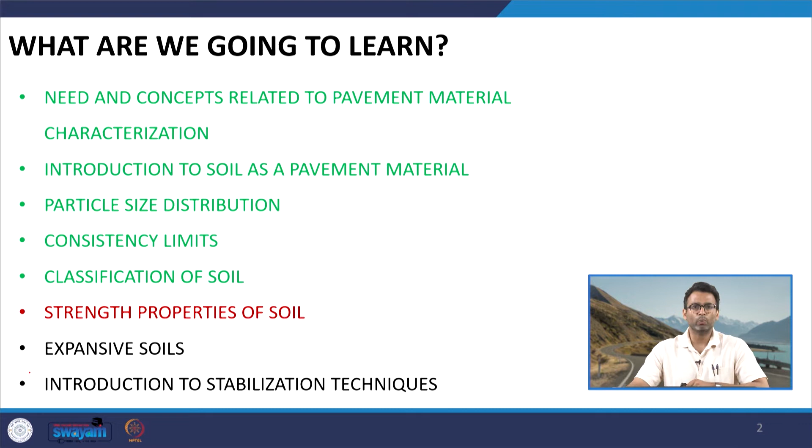Today we will start discussing the strength properties of soil. Under strength properties, first we will talk about the compaction characteristics in soil, which is one of the very important characteristics, especially when we talk about construction of pavements.

Ideally, any soil over which a construction has to be done, it can be any form of construction like a building, a dam, or a pavement, that soil should have sufficient load bearing capacity. In other words, it should have sufficient shear strength to take up the load from the superstructure.

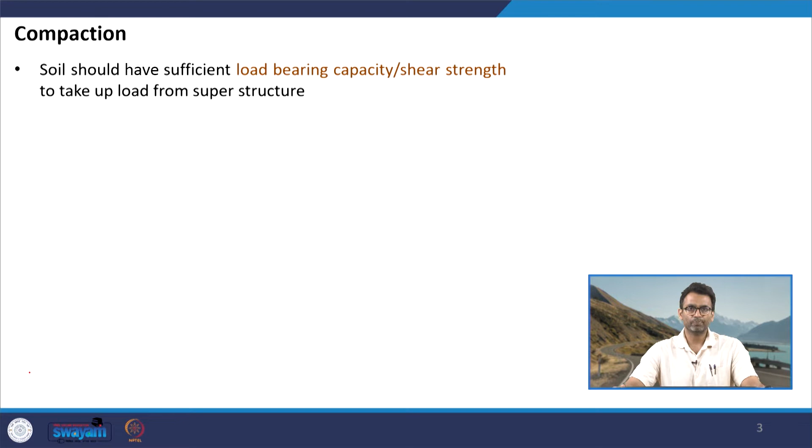Now, there are various ways of improving the soil, improving the load bearing capacity of the soil. Among various techniques, mechanical compaction is one of the efficient, and I would say one of the simple techniques to increase the bearing capacity of soils.

This is true both for cohesive and cohesionless soil. However, the effect of compaction on different types of soil can vary to different degrees. We will talk about these characteristics related to compaction for different soils today.

Now, when I say that compaction is a method to improve the load bearing capacity of soil, and that compaction is an important parameter to be considered for construction, how do we measure this degree of compaction, or how do we quantify the compaction in a given soil?

The compaction can be quantified using the parameter dry unit weight of the soil.

If you see the phase relationships of soil, there are various terms to be defined which you might have learned in a class on soil mechanics, or which you will learn later. However, you need not worry about those terms, because for us, the terms that are important, we will try to define and understand the physical significance of.

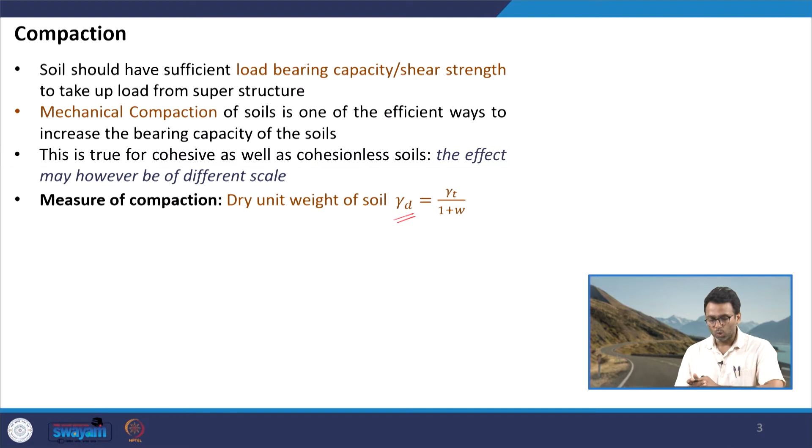So, the measure of compaction, as I said, is the dry unit weight of soil, denoted as gamma suffix d, gamma d. Looking at the volumetric phase of soil, gamma d is nothing but the weight of solids divided by the total volume of the soil material.

This is what you mean by the dry unit weight of soil, and it is related to gamma T, the total unit weight of soil, and W, the moisture content in the soil. The definition of moisture content we have already discussed: it is weight of water divided by weight of solids, into 100, in percentage.

Similarly, gamma T, the bulk unit weight of soil or total unit weight of soil, is defined as total weight of soil divided by total volume of soil. So when I say gamma T equals Wt by Vt, a soil mass comprises soil, air voids, and water. If all the voids are filled with water, then we have only soil and water present in the volume.

Therefore, the total weight of any soil, since air does not have any weight, can be written as weight of soil plus weight of water, divided by total volume.

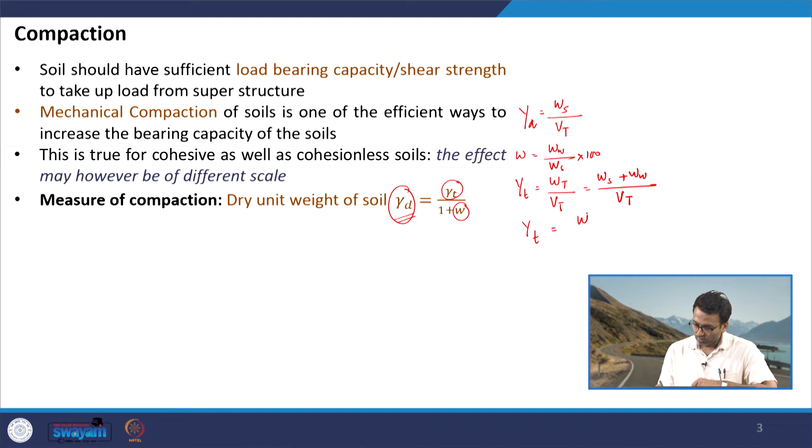Now, gamma T can therefore be written as weight of solid divided by Vt, plus weight of water. Now, moisture content, as I said, is equal to weight of water divided by weight of solid into 100. So, weight of water will become equal to the moisture content in the soil into the weight of solid, divided by Vt.

So, gamma T therefore becomes equal to weight of solid divided by Vt, into 1 plus W, and Ws divided by Vt is nothing but the dry unit weight of soil. So this is gamma D into 1 plus W. Therefore, the dry unit weight of soil becomes equal to gamma T by 1 plus W, which is also a parameter to quantify the degree of compaction in the soil.

So, higher the value of the dry unit weight, more compacted the soil is, more dense the soil is, and the soil will have higher strength.

Now, talking about the parameters that affect compaction, or in other words the parameters that affect the value of gamma d, are the moisture content and also the compactive effort.

So we will try to understand this figure first. This is the dry unit weight on the y axis, and on the x axis we have the water content. So when the soil is in a dry state and we slowly start increasing the water content, this water facilitates lubrication of the soil particles. The soil particles now have less friction between them to move about each other, so they can compact into a dense mass. As you increase the moisture content, the density of the soil increases at a particular effort of compaction, because compactive effort also affects the degree of compaction. So at a fixed compactive effort, this is what will happen.

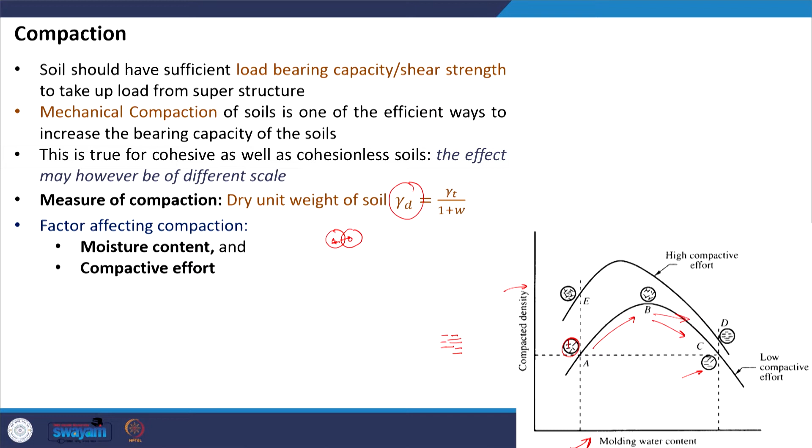And this is why the strength of the soil in this state is less, because the more flocculated the structure, the more particles are intermingled with each other, which means they have higher strength.

We will also discuss another curve, the shear strength versus moisture content curve. This curve will be similar to the dry density versus moisture content curve, but the optimum moisture content at which you achieve the highest shear strength is usually on the dry side of the typical density moisture content curve. Which means if the density is maximum here, probably for the same soil the shear strength will be maximum at a moisture content which is on the dry side of the optimum. The reason is the same: on the dry side you have a more flocculated structure, giving more shear strength between particles, compared to the right side of the curve, where you have a more dispersed structure, meaning the shear strength of the soil will be less.

This also tells us, in the field when we compact the soil, and shear strength is one of the important strength parameters, why not compact the soil at a moisture content lower than the optimum, or on the dry side of the optimum? The reason is, if you compact the soil on the dry side of the optimum, though you will have higher shear strength, if the moisture content of the soil changes and more moisture comes in, then the soil loses its strength. That is why usually in the field compaction is done corresponding to the dry density and not the shear strength parameter.

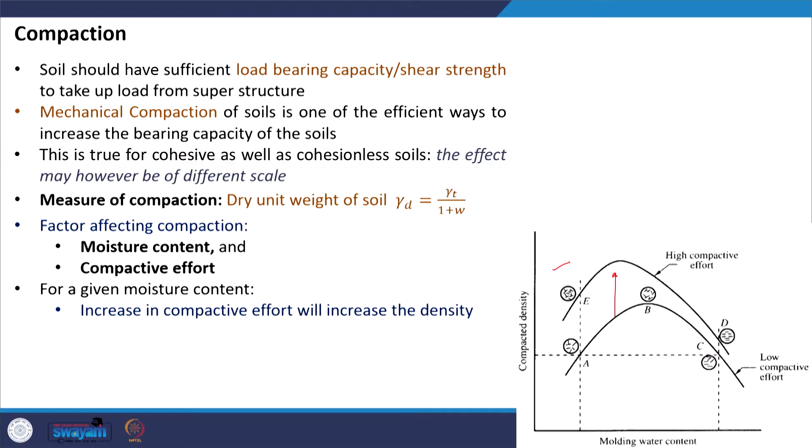Increasing the compactive effort shifts the optimum moisture content to the left. A higher compactive effort means the optimum moisture content at which we achieve highest density will be lower compared to the optimum moisture content for soil compacted at a lower compactive effort. So for a given moisture content, increase in compactive effort increases density, and for any given compactive effort there is one moisture content that leads to maximum density in the soil structure, called the optimum moisture content.

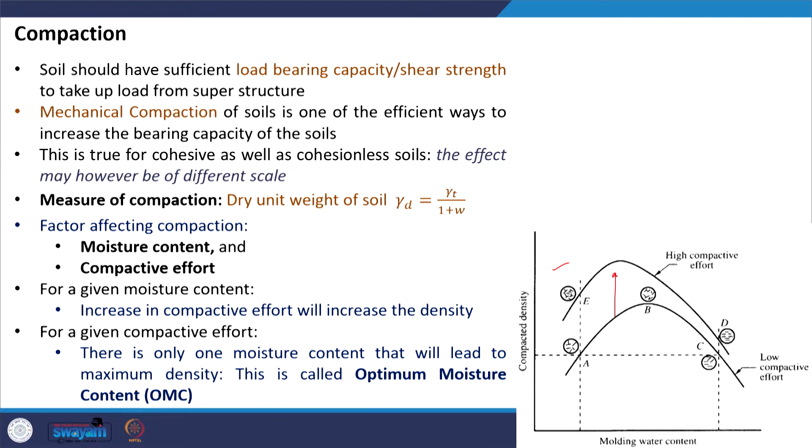In the field, once we know the optimum moisture content from laboratory experiments, we know the soil will be used for construction of embankment or subgrade. The soil present in the field will have some natural moisture content, so we find that moisture content and, knowing the optimum moisture content, add or subtract water as needed to ensure that while compacting, the soil is at the optimum moisture content.

In the field, we have various machinery to mix the soil with the required quantity of water, spread it to a uniform thickness, and then compact it. For mixing we can use blades or disc harrows, for spreading we use motor graders, and finally for compaction we use different types of rollers. We will discuss these as we proceed in this lecture.

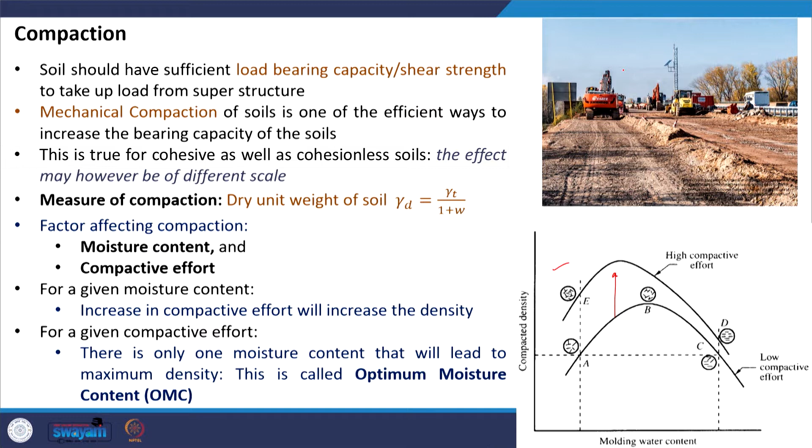Now let us discuss how, using laboratory experimentation, we evaluate the optimum moisture content for the soil and the corresponding dry density to be used in field construction.

For compaction of soil in the laboratory, usually we have two standard methods: the standard Proctor, also called light compaction, and the modified Proctor, also called heavy compaction. For pavement engineering purposes, most investigation done to evaluate optimum moisture content and dry density of soil is done corresponding to heavy compaction.

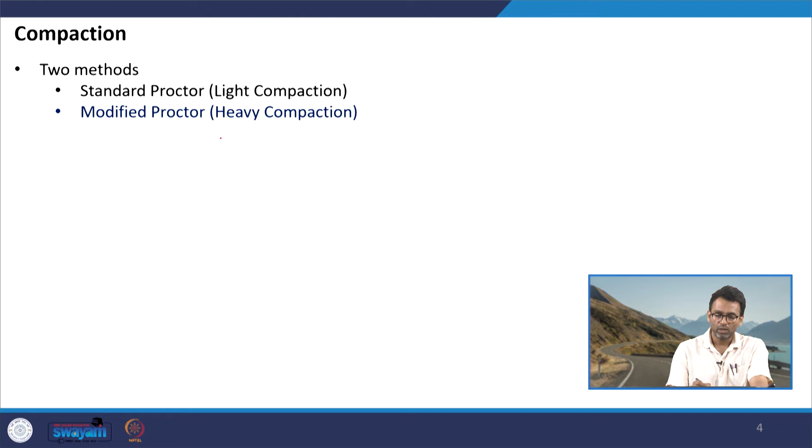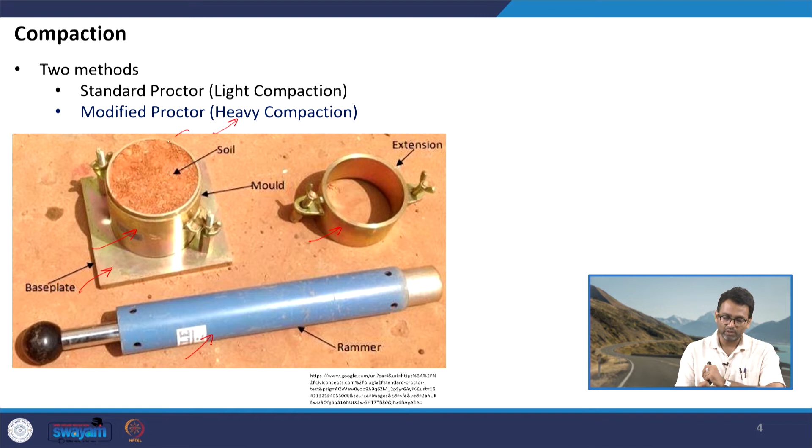These are some parts of the experimental setup used for doing the Proctor density test. We have a base plate, a standard mould, a collar, and then a hammer, and finally we compact the soil through a particular process.

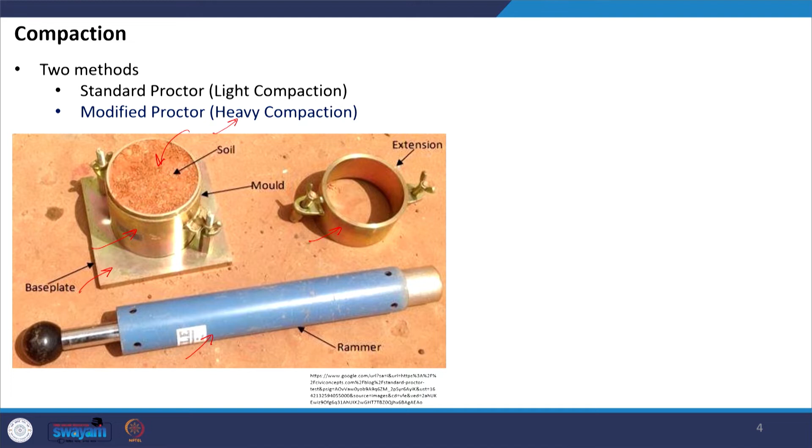Before discussing the steps involved in evaluating the optimum moisture content, let me show you the standard Proctor mould. In my hand I have the standard Proctor mould with the base plate and the cylindrical mould. We have a collar placed at the top, used to remove excess soil after completing the compaction process. Then we have a hammer here, free to move, which has a specific weight and a specific height of fall while doing the compaction test.

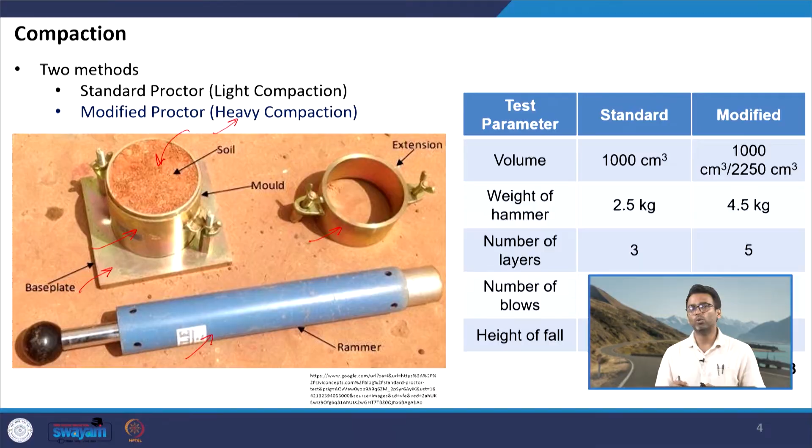Now let us see the steps involved and the difference between standard Proctor and modified Proctor, and discuss the steps used in the laboratory for this experiment. In general this is a very simple experiment; it requires some physical effort, but the procedure is simple.

The standard Proctor mould is 1000 cubic centimeters in volume. The modified Proctor mould can be 1000 cubic centimeters as well as 2250 cubic centimeters. The one with 2250 cubic centimeters has a cylindrical diameter of 150 mm, while the 1000 cubic centimeter cylinder has a diameter of 100 mm.

So when do we use the 2250 cubic centimeter modified Proctor mould? This is used when the maximum size of aggregate in the soil structure being analyzed is up to 37.5 mm. The reason is, in a small mould, if the aggregate structure has some particles of very large size, when you put this material in the mould those larger particles may occupy the surface, and when compaction is given, it is applied ideally on these larger particles, making the compaction non-uniform and the transfer of energy non-uniform in the soil structure.

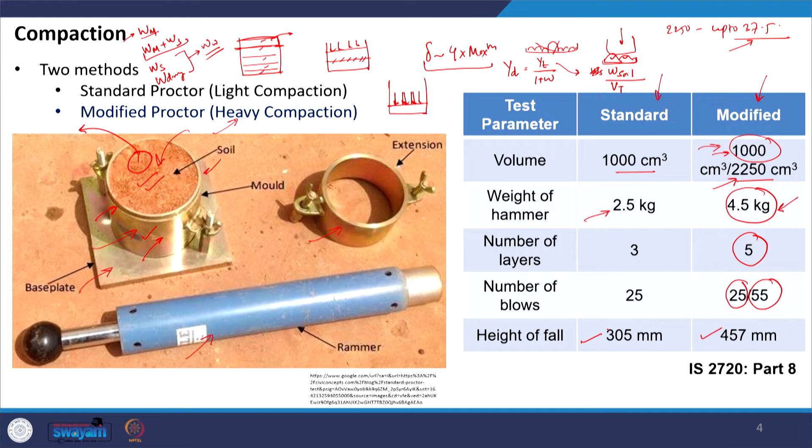The height of fall when you are doing the compaction in the modified Proctor is 457 mm, while in standard Proctor it is 305 mm. So these are some of the test parameters. We have already discussed the process of doing the test.

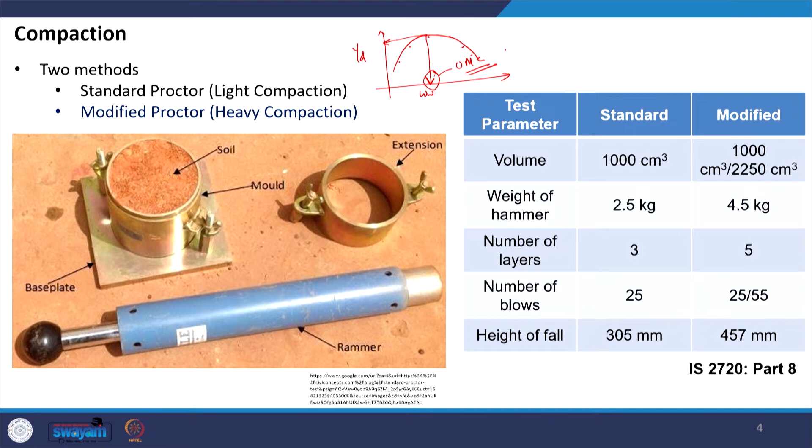So finally what we will have is a curve at different moisture content and different dry densities. You have some points here, just join this point using a smooth curve, and you see that at the maximum dry unit weight, what is the moisture content, and this moisture content is the optimum moisture content. I hope this process of doing the test is now clear to you. This is a typical curve which you will get after you perform the test.

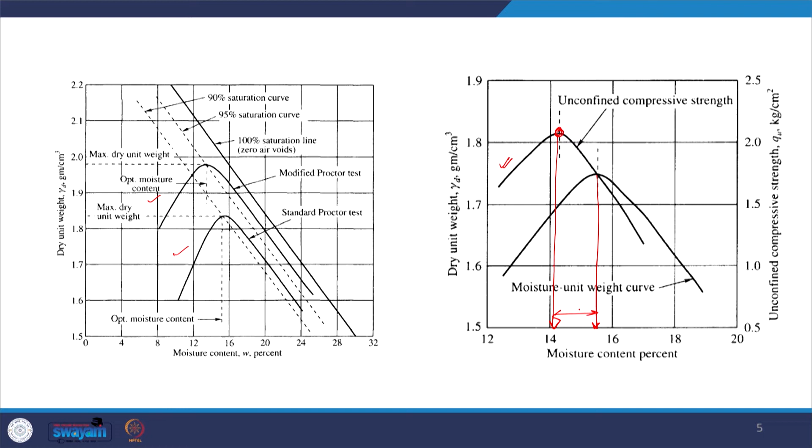As I mentioned, if you are trying to find the shear strength of soil, you will have a similar curve, but the moisture content at which you get the highest shear strength will be lower than the moisture content at which you get the maximum density. But in the field, we will take the curve corresponding to the maximum dry density.

Now let us see what happens if it is a sandy type of soil. Sandy soil has some typical characteristics. Let us assume we have purely spherical particles of the same size, placed in the loose state. In the loose state, if you try to find the void ratio - which is a new term, the volume of voids divided by the volume of solids -

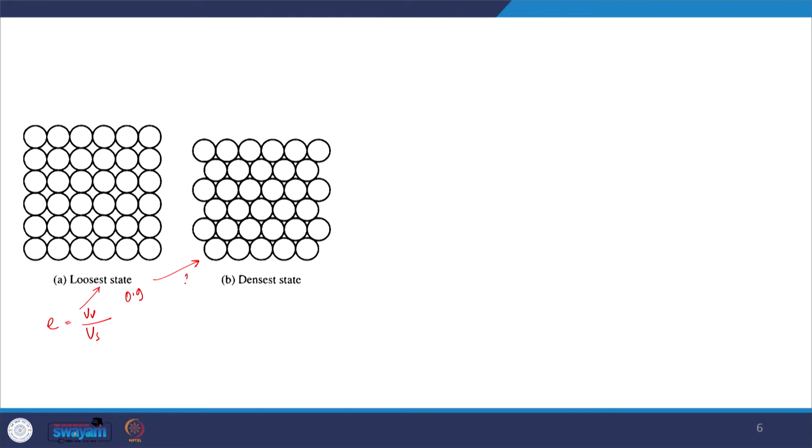the void ratio is typically very high, about 0.9. The same soil particles, if placed in the dense state, will have a void ratio of approximately 0.35. Here we are assuming the particles are of the same size. In the mass, if we have larger and smaller particles, the smaller particles will pack inside the voids created by the larger particles, so the void ratio in the densest state will further reduce, to as low as 0.25.

So in sandy soils, which do not have cohesion, in the loosest state they have some packing characteristic in terms of void ratio, and in the densest state also they have some packing characteristic. These are both in the dry state - we have not added any moisture - still these two states can be achieved. The density of such soil in the field is rather quantified by comparing the actual density with these two extreme states of density.

So that is called the relative density. Relative density for sandy soil is calculated as E max minus E actual, divided by E max minus E min. This is more of a normalized form of denoting the density of the soil.

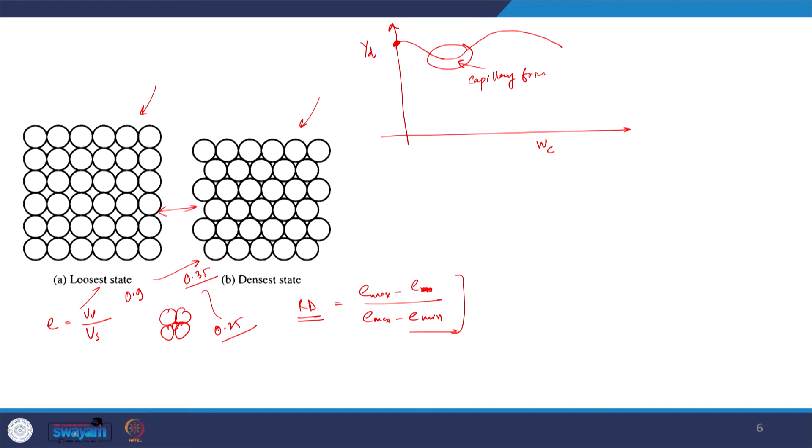If you see the variation of density of sandy soils with respect to moisture content - looking at dry density - when moisture content is 0 and the soil is compacted, you get some dense packing. With increase in moisture content, initially the density will reduce, and then after some time the density increases. The reason for this reduction in density is the capillary forces of water, which resist the packing of the sand particles. This is the point where you see complete saturation of the sandy soil.

One more typical characteristic of sandy soil, being cohesionless, is that applying only compactive effort will not lead to increase in density. This compactive effort should be in addition to some vibratory loading. If you give a vibratory load to cohesionless soil, it will pack into a more dense configuration compared to giving only a static load to densify that soil mass.

You can also try this experiment very simply at home. Take a clear glass or bowl, take some natural sand in dry state and fill it in the cup - you will see the sand occupies some volume. If you pat with your palm on the sides of the cup, you will see the sand particles settle down and pack into a dense configuration. This is a form of vibratory loading which we give with our palms, just by shaking the glass or bowl, and it densifies.

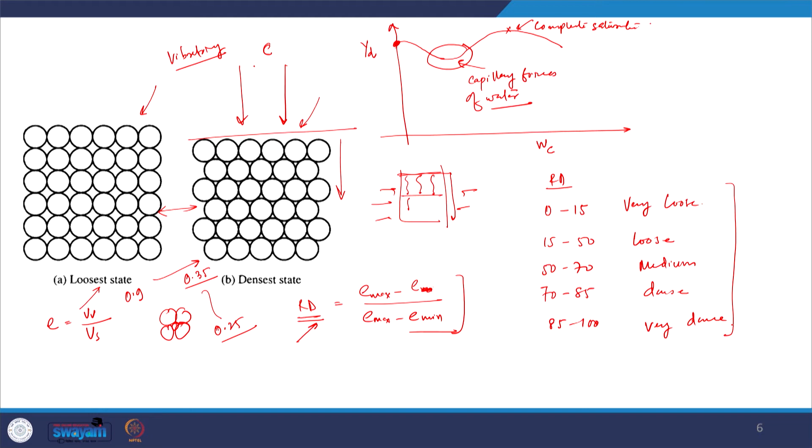This indicates that vibratory loads are more appropriate for compacting cohesionless soil compared to static load. Based on the value of relative density, we can categorize cohesionless soil into different categories. If relative density is between 0 to 15, the soil is very loose. Between 15 to 50, it is loose. Between 50 to 70, it is medium. Between 70 to 85, it is dense, and between 85 to 100, it is very dense. This is an approximate way to quantify the compaction characteristic of cohesionless soils.

So, let us now discuss what we actually do in the field. We have different equipment for initiating or completing the compaction process. We have blades and disc harrows to pulverize the soil and mix it with a given moisture content. We have motor graders to uniformly lay the soil at a particular depth, and then we use rollers, a typical roller you see on the screen here, to compact the soil.

So usually, let us say you are trying to construct a 1 meter embankment. We do not put the entire volume of soil in this 1 meter depth at once and compact it, because the machinery we have, the typical rollers we use, will not be able to compact this entire soil to the required dry density. After compaction, each layer, each point should have that particular design dry density in the field.

So usually the soil or any layer is compacted in sublayers, and the depth of the sublayer in loose condition will depend on the type of roller and the type of soil. For example, in embankment and subgrade, at one go we can compact up to 200 mm or 250 mm. In case of granular layers, we can compact in layers of 100 mm or 200 mm and so on, depending on the type of roller used in the compaction process.

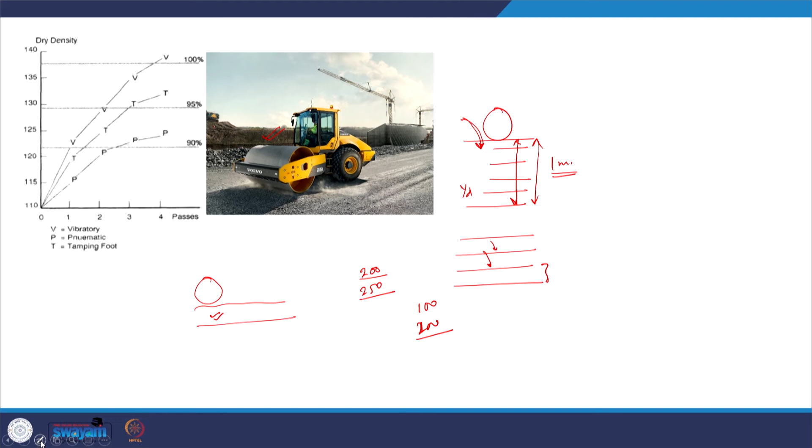So how do we assess how many passes of rollers will be required at this site? Typically, we construct a test section. In the test section we use the same soil with the given moisture content, and we do trial passes, drawing a curve between number of passes and dry density for different types of rollers, depending on which roller has been decided for use. Let us say you have decided that a vibratory roller will be used. You plot this graph from the data obtained from the trial stretch, and use this graph for construction purposes.

From here you will see what your design specification is. Let us say the design specification is that a minimum of 98% of the dry density is required. You will see what that particular value is. Let us say this is the 98% of the dry density achieved in the modified Proctor test. You take this value and determine how many passes are required. For different types of rollers the curve will be different, because all rollers give a different magnitude of energy to the soil being compacted.

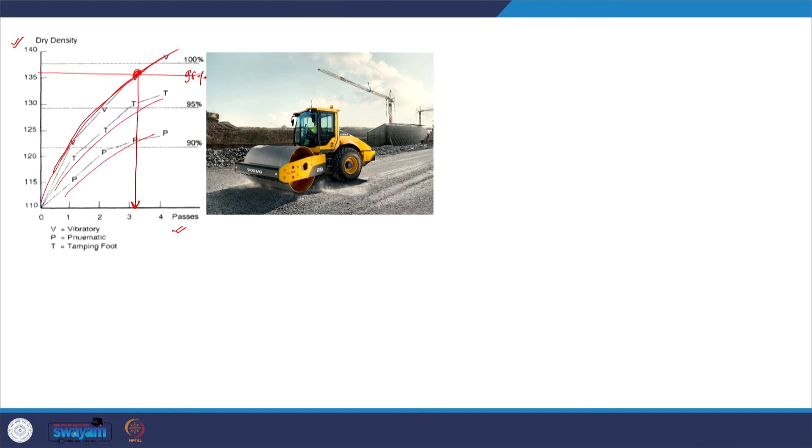So we have various types of rollers available for compaction. We have static rollers that just move and compact the soil. We have vibratory rollers which can be operated at different frequencies, giving a vibratory load to the soil for compaction. We can have sheepsfoot rollers, which are mostly suitable when using cohesive soils.

We have pneumatic tyre rollers which can apply different magnitudes of pressure using the pneumatic tires. For example, if you talk about pavement construction, for the construction of subgrade and embankment, we have different options of rollers. For example, we can use a static 3-wheel roller.

We can use a self-propelled single drum vibratory roller, we can use a tandem vibratory roller, we can use a pneumatic tire roller, we can also use a pad foot roller.

The engineer has to decide which roller he or she needs to use, but ultimately the purpose of the roller is to achieve the desired density value, that is the design density corresponding to the value of density we have achieved in the modified Proctor test in the laboratory.

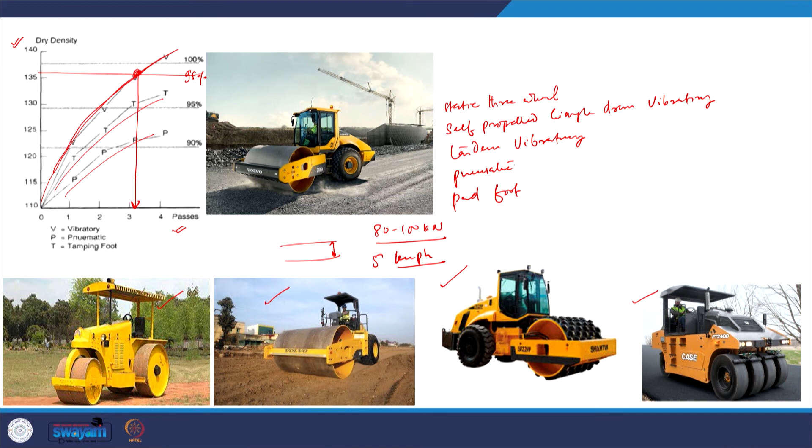Two important questions which we also need to answer when we talk about compaction: the first is how to validate field compaction, and the second is how do we decide the type of rollers which we have to use.

The type of roller to be used depends on the type of soil. For example, if it is a cohesionless soil, you can prefer to use vibratory rollers or pneumatic tyre rollers. If it is a cohesive soil, we can use pad foot rollers or sheep foot rollers, pneumatic tire rollers, and so on.

Now coming to the second question: how to validate the field compaction. What do you mean by validating field compaction? Let us say we have a subgrade layer here, and from laboratory modified Proctor test we have evaluated that the dry density of the sample for design should be, say, 20 kilonewtons per meter cube. Once the construction has been done and we go and visit the site, what do we do to ensure that this layer which has been compacted has a dry density of 20 kilonewtons per meter cube?

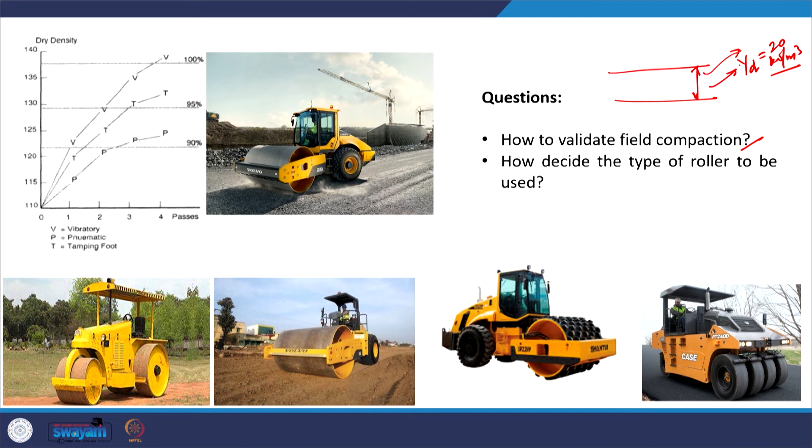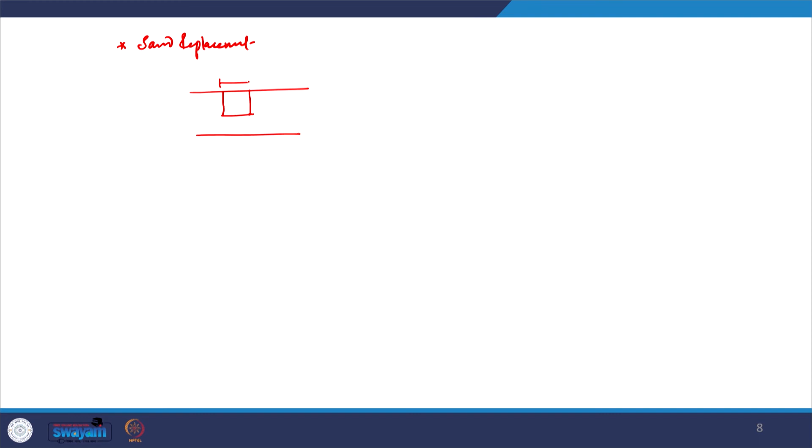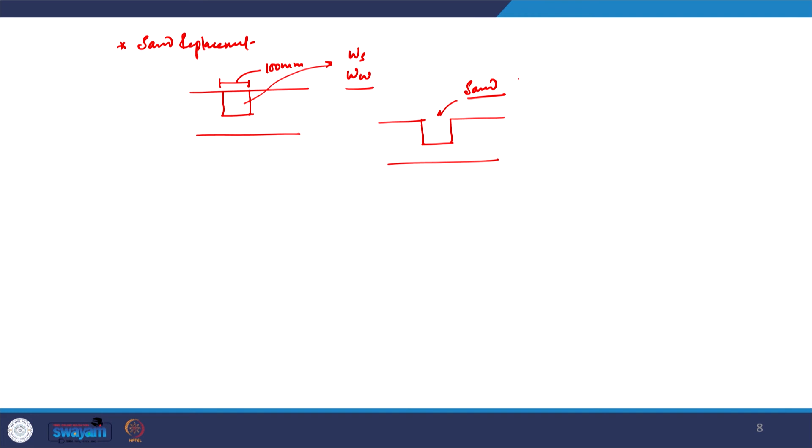There are various methods available to validate the field compaction process. For example, we have a very popular method which is the sand replacement method. In this method, the subgrade soil which has been constructed, we dig out some soil from it, typically kept as 100 mm. This soil is weighed, and we also determine the moisture content in the soil. Now this hole which has been made after removing the soil, we can fill it with a sand material. This is a standard sand material whose specific gravity we already know from laboratory experimentation.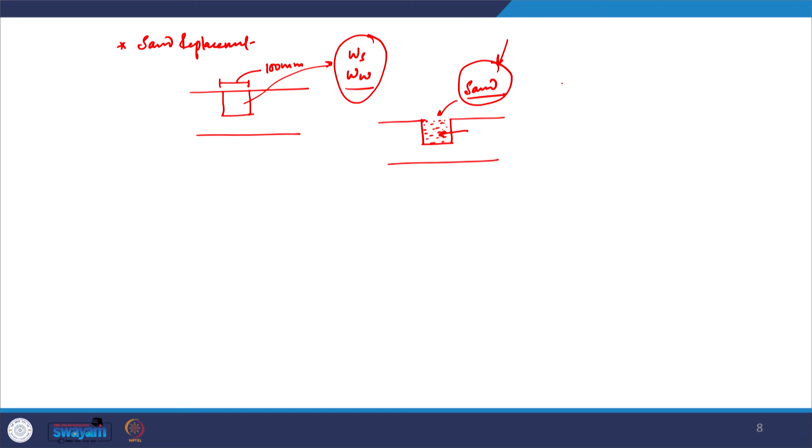This entire space which has been made will be filled by the sand material. This sand is basically a standard sand which we use to fill the hole, and we can say that the volume of sand in the hole which we have put is equal to the volume of soil that has been removed.

Since this is a standard sand, we know the specific gravity of the sand, which is the unit weight of sand divided by the unit weight of water. From here I can calculate further that this is weight of the sand divided by volume of the sand divided by unit weight of water. I can calculate the volume of sand here as weight of the sand divided by specific gravity of the sand into unit weight of water, and this is nothing but the volume of the soil that has been removed.

From the removed sample we also have the weight of the soil that was removed and the moisture content in that soil. So we can calculate the dry density as gamma T by 1 plus W, where gamma T is the weight of the soil divided by the volume, which is nothing but volume of the sand, divided by 1 plus W. So this is one way of validating the dry density of the soil of a constructed layer. Another popular method is the core cutter method, which is again very simple in nature. We have a core cutter.

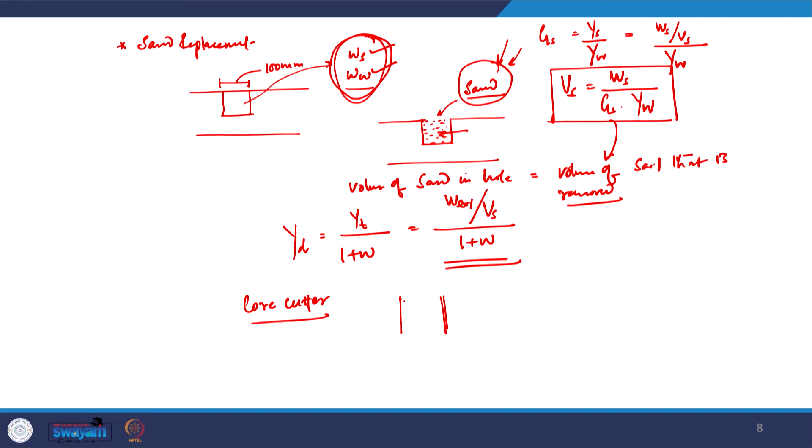This core cutter is basically pressed inside the soil mass. So this is at the surface. Once it is pressed, you will see it like this. We know the volume of this cylinder, so we will remove it and get the soil mass inside. We can take the weight of the soil, know the moisture content, and use the direct formula gamma T by 1 plus W, where gamma T is weight of soil divided by the volume of the standard mold, and W is the moisture content in that soil. So using the core cutter method, we can validate field compaction.

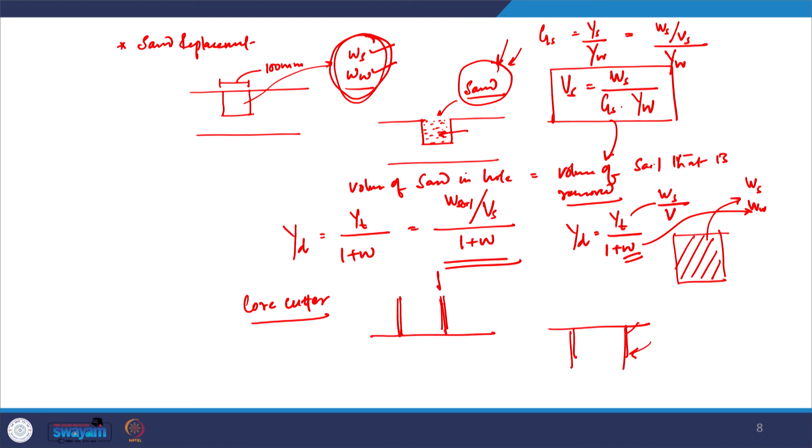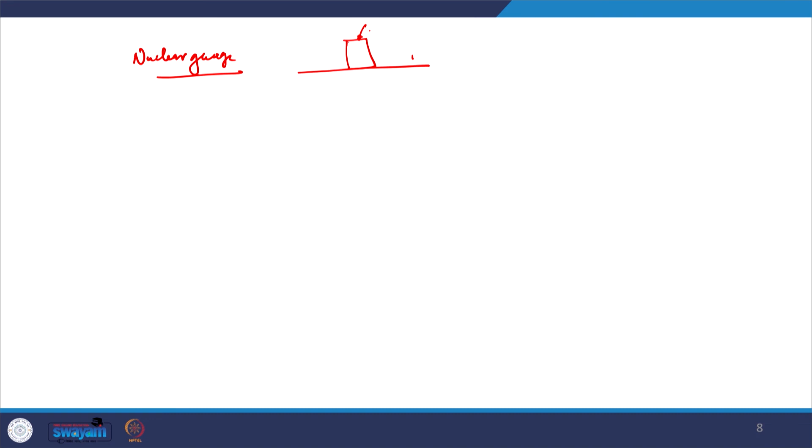Another method to validate field compaction, more commonly used these days, is the use of a nuclear gauge. This nuclear gauge is an instrument you can put on the surface of the layer, and just by looking at the reading, it will give you the dry density of soil. This nuclear gauge basically works on the principle of interference of gamma radiation, scattering and backscattering with the soil. But it is important that the nuclear gauge used to measure field compaction is calibrated properly, so that the results we get are reliable.

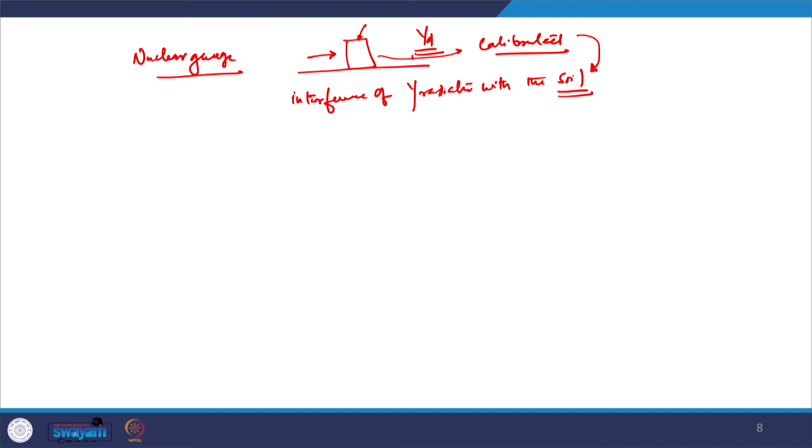I hope this is clear from our discussion, how field compaction can be validated after the construction has been done.

Well, this is just for practice. You can use this data and try to calculate the optimum moisture content and dry density. This is a Proctor test: the volume of the mold has been given, the weight of the mold, and the weight of mold plus compacted soil for each trial, along with the water content. One clarification: this water content is not the water content at which we are moulding the soil. During the moulding process in the lab, some moisture can be lost. So you have to determine the moisture content using the weight of the soil and oven drying it, taking the oven dried weight, then calculate the actual moisture content, and plot moisture content versus dry density.

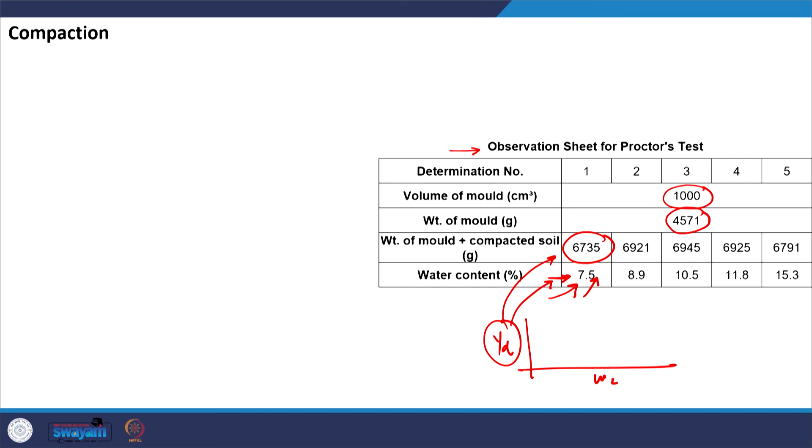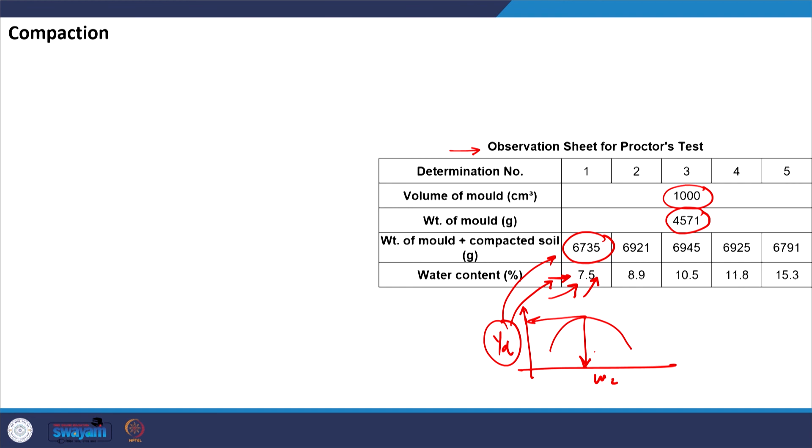You already know the relationship between dry density, total unit weight, and moisture content. Use that relationship, calculate gamma D, and plot the curve. After plotting, calculate the maximum dry density and the corresponding moisture content. Alright, so this is just for practice.

Now coming to the specification. Finally, we are learning about compaction for use in pavement construction. So we also have to see the relevant specifications corresponding to the requirement of dry density. For embankment construction, if the embankment is more than 3 meters in height, as per Ministry of Road Transport and Highways, the minimum density of soil should be 16 kilonewtons per meter cube. If the embankment height is less than 3 meters, the minimum dry density required is 15.2 kilonewtons per meter cube. We do the modified Proctor density test in the lab, and in the field we must ensure the density is at least 95% of the modified Proctor density.

Talking about subgrade, the density requirement is a little higher than for embankment. The minimum density requirement is 17.5 kilonewtons per meter cube, and compaction should be carried out such that we achieve at least 97% of the modified Proctor density. For granular subbase and base, compacted on the prepared subgrade, we need to achieve a minimum density of at least 98% of the maximum dry density from the modified Proctor test.

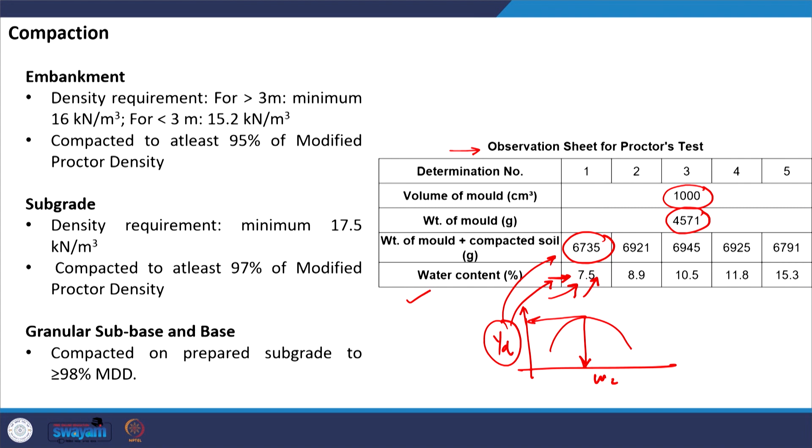With this, we will stop here today. Today we discussed the compaction characteristics of soil, the importance of compaction in the construction process, and the factors that influence compaction, including how cohesive soils differ from cohesionless soil. We discussed the steps for laboratory evaluation of optimum moisture content and maximum dry density, the application of laboratory results for construction in the field, how the number of roller passes is decided to achieve the desired density level, and finally the available methods to validate field compaction.

In the next class, we will start talking about the shear strength of soil, which falls under the same topic of strength properties of soil. Thank you.